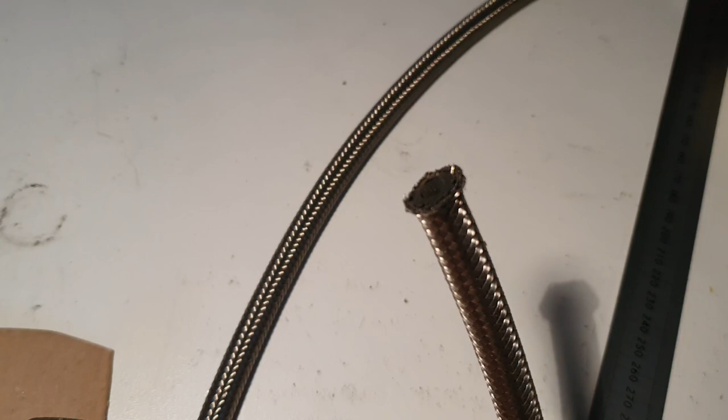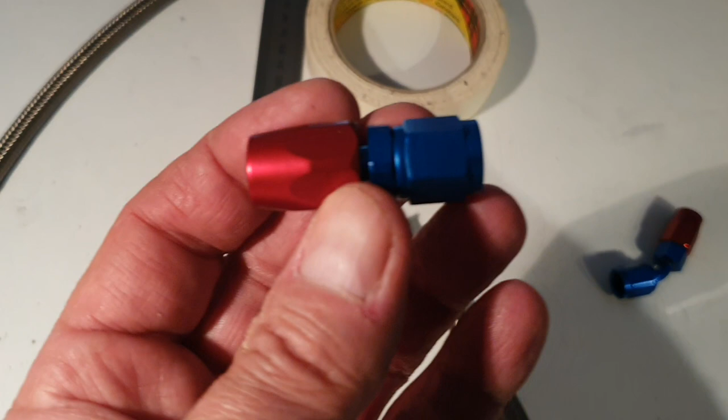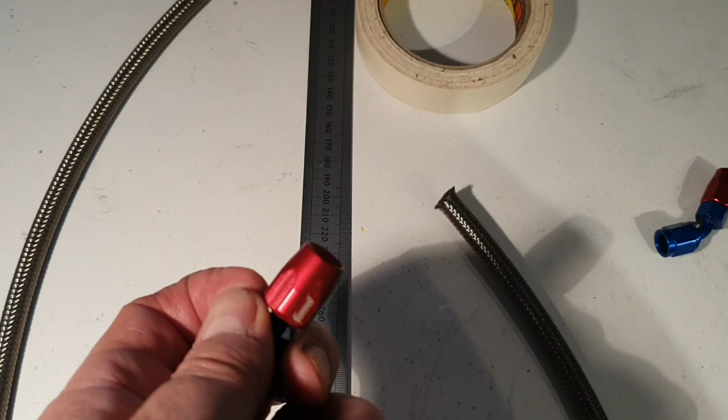This is the stainless steel braided hose. You can see the rubber hose in the center and the stainless steel braid around the outside, and then this is the style of fitting that goes on the end. It's in two pieces. The red piece is separate and unscrews off a bit like that. If I can do it with one hand, which I think I can. There we go, it's almost off.

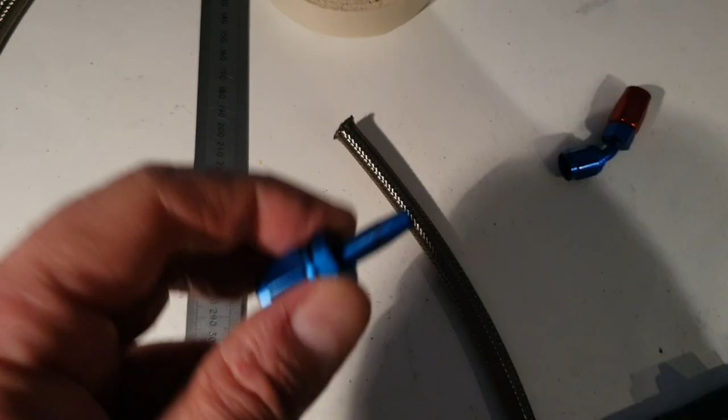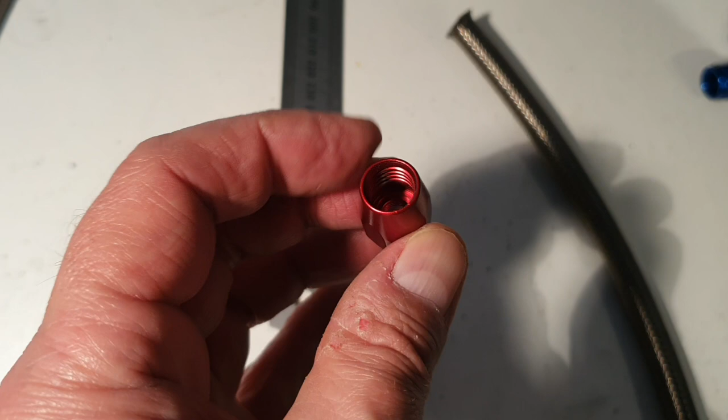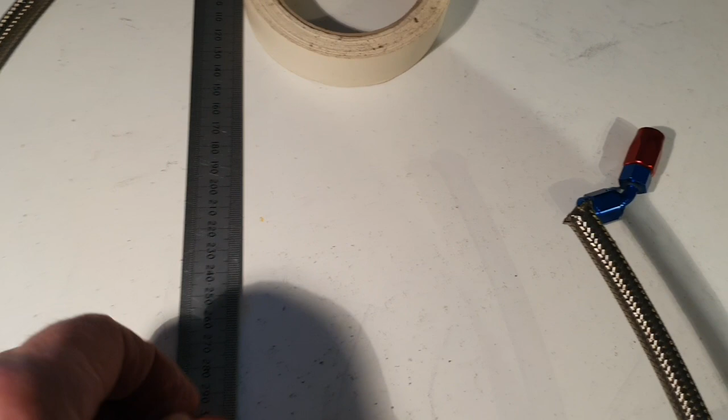So you've got this part which fits up the inside of the rubber tube, and this part which is used for securing it on. The thing you have to note with these ones is that you can see there's a thread on the inside, quite a light thread, but a thread nonetheless on the inside of the barrel of that part of the fitting. And the idea is that you insert that into the red piece. It's a left-hand thread in there, so you have to turn it anti-clockwise to get it in, until it gets right down to the bottom ledge inside there, and then you can see it on the inside of that hole there.

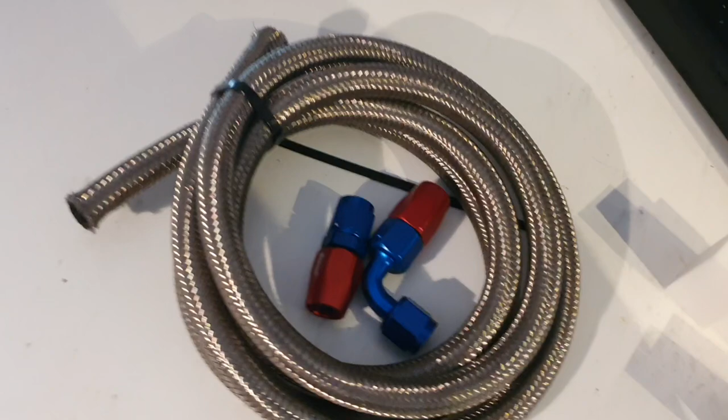But the big problem is this is stainless steel braided hose, and as you can see, the stainless steel braid fuzzes out. A better example is this one, and it's almost impossible to get it in there. This is the AN4 fitting and hose. There's also one hose you've got to do, which is an AN6 hose and fittings.

So how do you get that into there? Well, if you go on the internet, there's a lot of custom car people who can give you an idea of how to do this. Theoretically, what you're supposed to do is to buy the special hose guillotine, for want of a better description. It's a bit like a big pair of wire cutters, and it has very special shaped blades on it which go round the outside of the steel braiding and chop it off in one cut effectively.

I've only got 6 connectors to put on, and to buy the tool was quite expensive, so I need to find a different solution. So I had another look online, and there's a number of YouTube videos where people have tackled the same problem, and the consensus is that the only way to do this is to basically take the end, bind it as tightly as you can with tape, something that doesn't stretch, before you cut the end off, and then chop the end off with either a cutting disc in an angle grinder or your trusty Dremel.

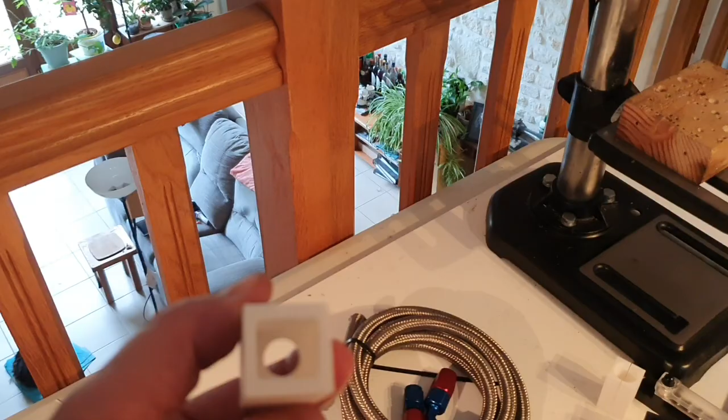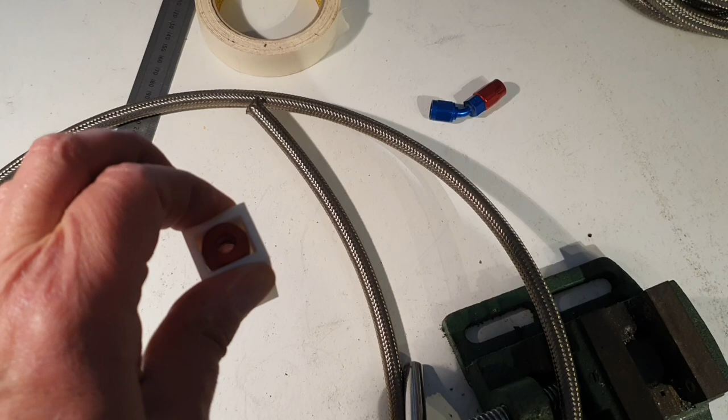This was my prototype. It has a rectangular hole in the bottom end, which you can put that one in, and when you stick it in the vise and squidge it, it holds it still. And then there's a funnel to push your braided hose into and insert it.

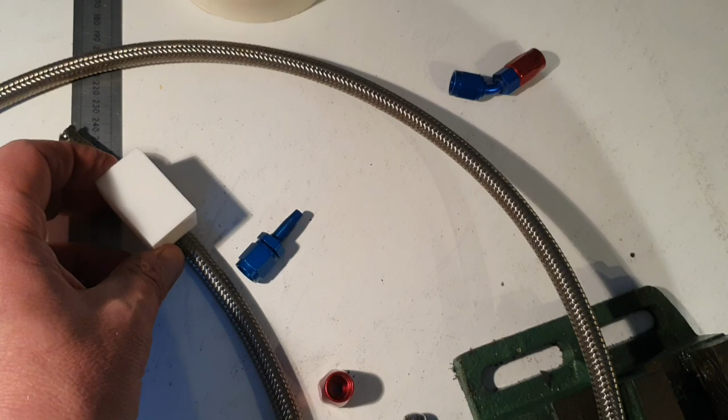But once I'd made this, I suddenly thought, well, that's all very well, but once you've inserted the cable, the thing's locked onto the whole assembly and you can't get it off. Especially if you've done one on the other end of the cable. So that was a bit stupid. So I then went for version 2.

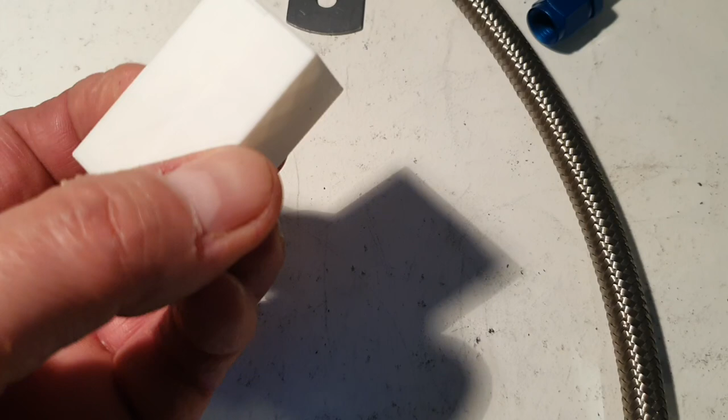This is another prototype. And so I made a split one, which works in exactly the same way. You pop that one in there, it sits in there, and then you pop that in there, stick it in the vise and squash it, and then you can see it's got a nice taper for the braid to go down and go in. But it was a bit wibbly wobbly and it didn't quite fit, so I had to do version 3.

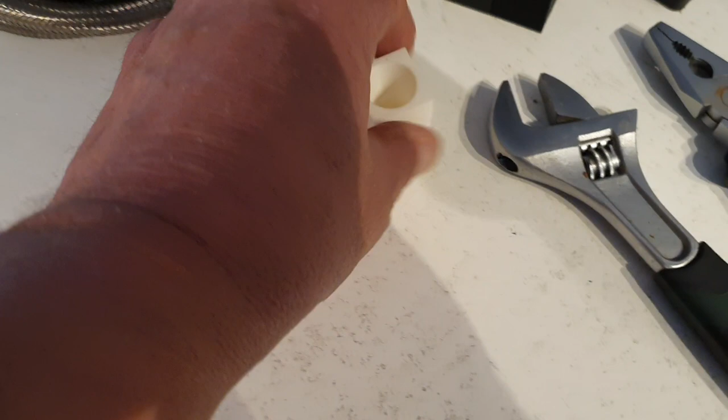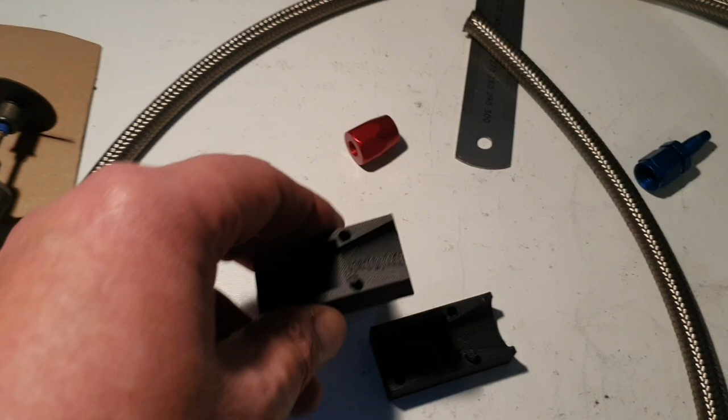And version 3 is this one. And here I've extended it slightly and put another couple of locking dowels in it, and this one actually is the final version, and I've printed this out in ABS rather than in PLA because it's a lot harder. So that's where we're at with that. So I'm going to go and test it now and we'll see how it works.

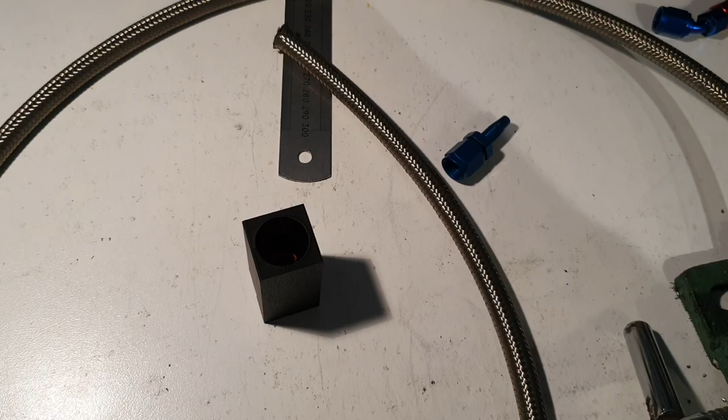More later. And as if by magic, it's done. I couldn't believe how easy it actually was, considering I've tried everything to get this damn braid inside that red fitting. And it's exactly what you need. You need a little funnel to guide the braid into the hole, and then it all just happens.

So what I'm going to do is I'm going to try and do one live for you. Well, it's not going to be quite live. I'm going to have to do it in several sections, but I'll tape up another piece, cut another end, and use the tool again, and we'll see how it goes together. All right, see you in a minute.

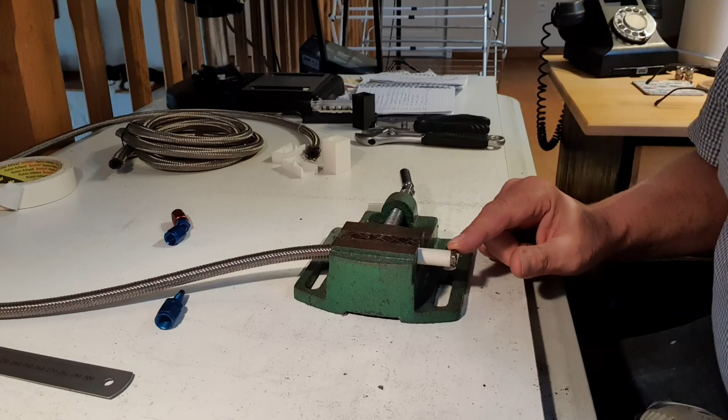So here I've got the hose. I've wrapped loads and loads of masking tape around it, probably 10 thicknesses of masking tape around it, as tight as I can get it. And so now I'm going to use the trusty Dremel and try and chop through the centre part here to make a nice end.

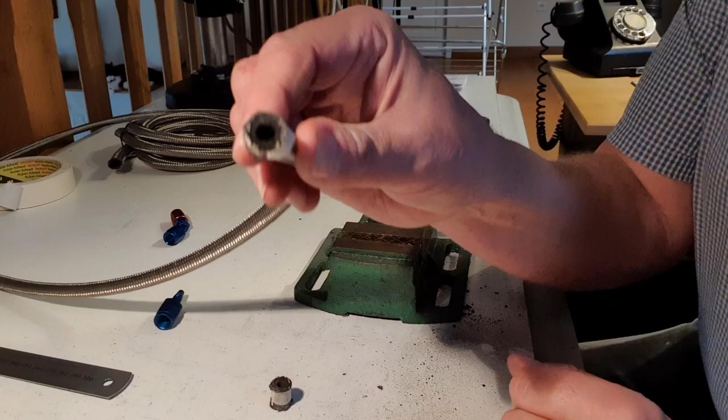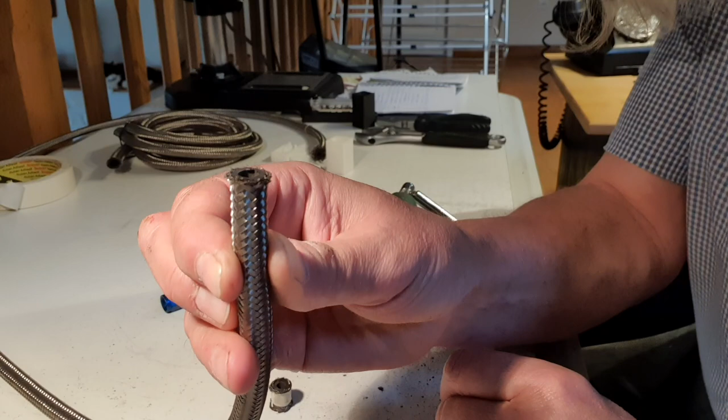And there we are. That's about as tight as you can get it. When you take the tape off, it's going to fluff out a little bit, but hopefully not too much. There we go. That's the best you can get, really, doing it this way, I've found. So now I'm going to load up the fitting into my little gadget, and we'll resume.

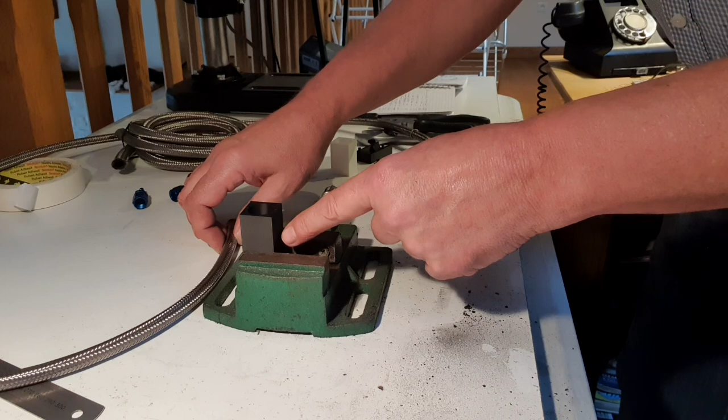So now I've got the part, the red part of the connector inside my little gadget. It's secured into the vise. Here I've got my braided hose, and I need to turn the hose anti-clockwise. So instead of doing that, I'm going to rotate this vise clockwise. Here we go.

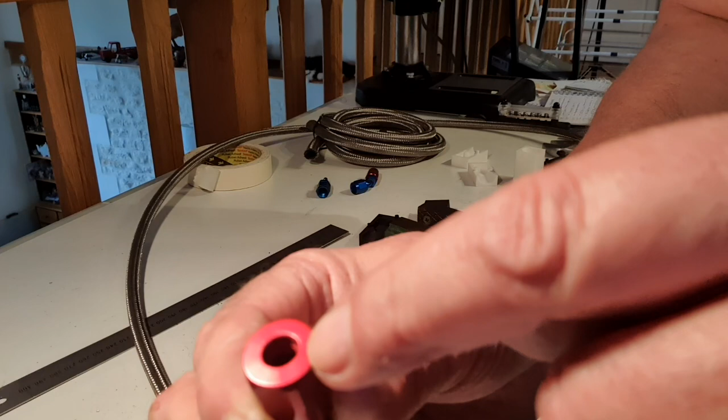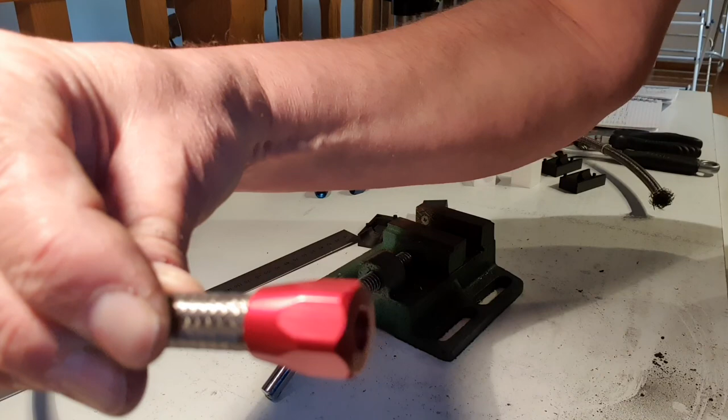There we go, it's gone tight. Now if we look in there, I don't know whether you can see this, turn it round a little bit, but you can see the rubber pipe is right up against the lip in there, and it looks like a perfect fit.

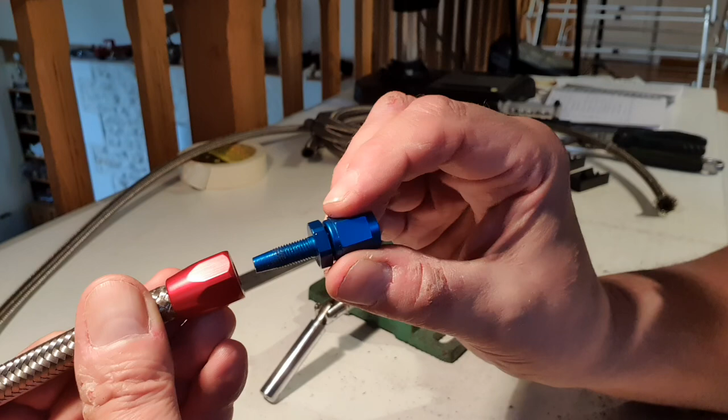So the next part is to insert the blue section, and this has got a normal clockwise thread on it, and that pushes into the center of the rubber tube and then causes the rubber tube to swell as it goes in. And I'll have to get a spanner on this to do it up fully, so I'll do that and then return.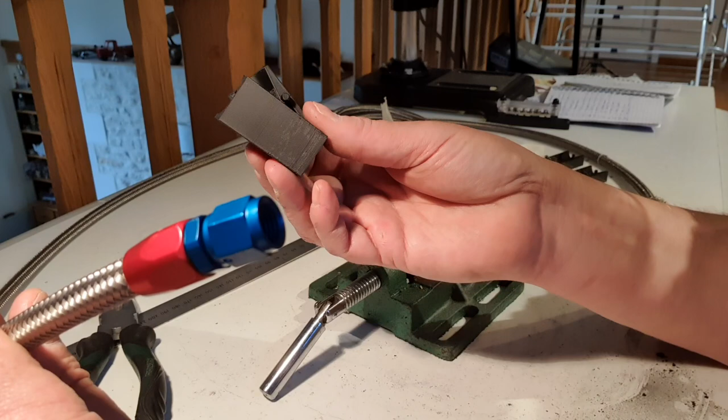I've got to do a different sized one for the AN6 connectors, because obviously they're bigger. So I'm pretty chuffed with that. It looked almost impossible to do. It's taken a little bit of research on the internet to find the solution, and a little bit of tinkering on the computer.

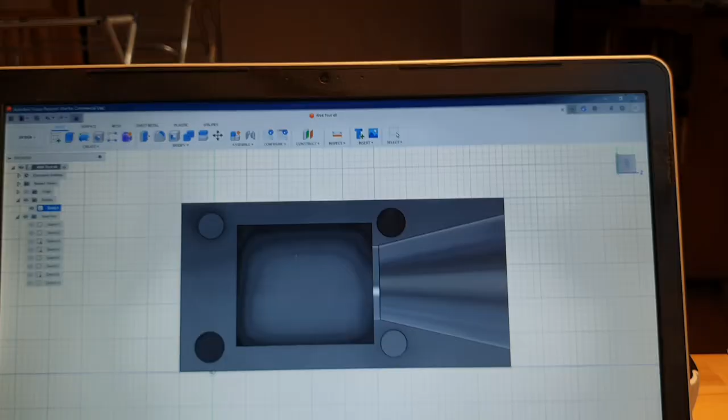I've actually got here the design on the computer, just out of interest, if anybody's interested in anything like that. If my computer will come back to life. There it goes. There's the part. It's just one part, and you put two identical pieces together in order to make the tool.

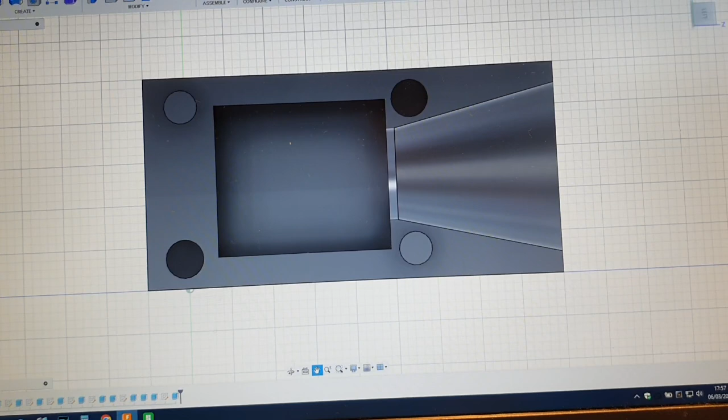But you can see the area that the connector sits in. I haven't bothered to make it a hexagonal thing. It only clamps on two flat faces, but because I stick it in the vise and clamp it across those two flat faces, it doesn't rotate. And there you can see the funnel for the braid to go down into.

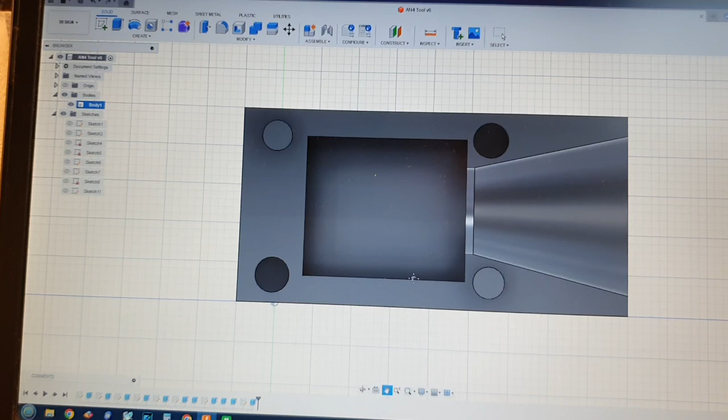Turn it round a bit. There we go. You can see the sort of 3D-ishness of it.

Anyway, interesting. So I've now done 3 out of 4 AN4 ends, and I've got the 2 AN6 ends to do. So I'll busy away and do that.

And as a slight interlude, there's a little extra piece on the end of this video of what happened earlier with the kit car. So until I see you next time, more later.

So I was going to go in the garage and work on the engine whilst I'm waiting for the parts for the electrical system to arrive, but fate intervened. And as some of you know, about 15 years ago I built a car.

It's a kit car, a British JBA Falcon, based on a Ford Sierra underneath, and I stuck a 3-litre V6 engine in it, and took it to track days and raced it around circuits in the UK and in France for a few years. Nowadays I just use it as a Sunday car when the sun comes out, and sometimes we go away in it for a little adventure now and again.

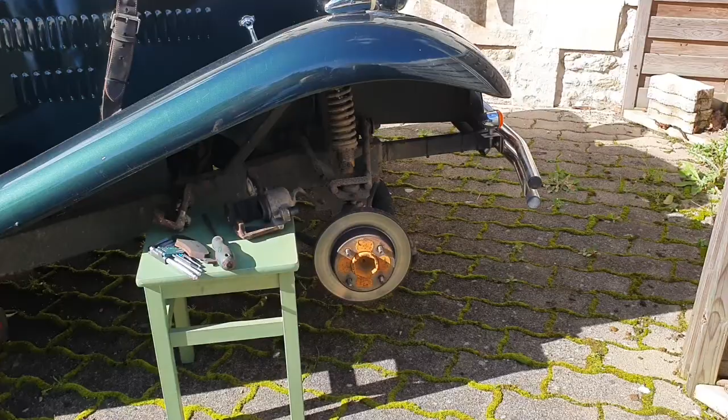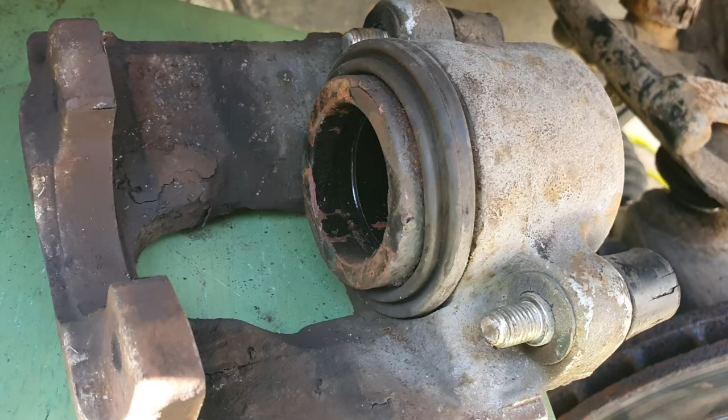So there's the front disc brake, and the caliper is sitting under here, and that is the offending piston, which is pretty solid. It doesn't want to move, and somehow I need to get it moving to the point where it will pass the test tomorrow. I don't really want to take it out. I don't want to disconnect any of the hydraulic cables, because then I'd have to drain and bleed the system, and that would be a pain in the arse.

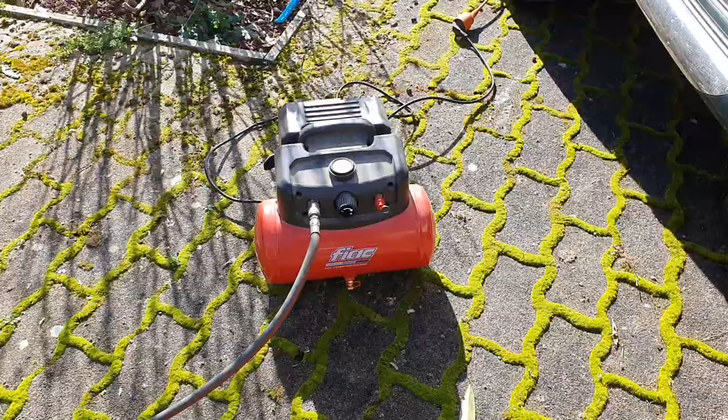So to get it all apart, I brought the very portable air compressor out with me, and got the air ratchet on there, and got it jacked up in the air and working on it. Hopefully it'll be running again by tomorrow lunchtime. Anyway, that's what I'm up to at the moment. Not building any airplane, more later.

Well, after struggling with the brakes, I did actually get them moving and put it all back on the car again. Took it down the road. It was better, but it still shot to the left every time I put my foot on the brake. And actually, when I got back, I looked at the two front wheels and they weren't actually pointing in exactly the same direction, which is probably a sign that there could be something wrong.

So as I don't have a decent set of ramps to get the thing up in the air, so I can get underneath it and have a look at all four corners at the same time, I've elected to take it down to the trusty mechanic down the road, JP, and let him have a go. I'll probably do the work myself once he's worked out what's wrong with it, but I need his help to diagnose why it's suddenly gone a bit squiffy.